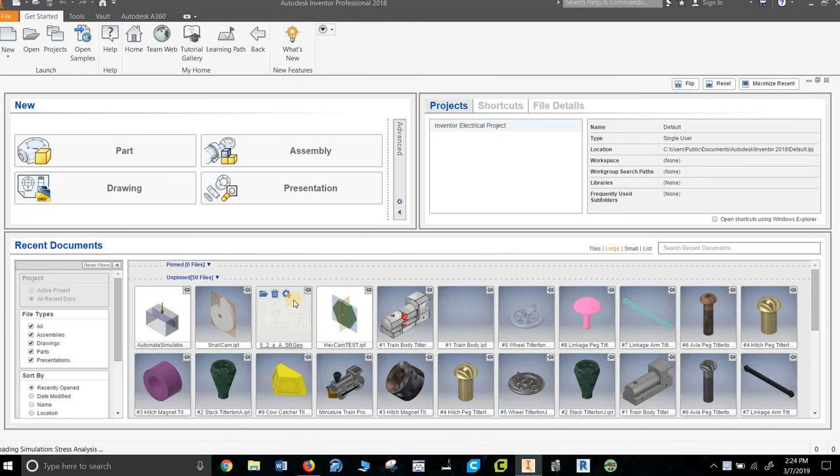So create your part, and the first thing I would do is save it. I'm not actually going to, because I don't save these. I just make them every time I need them, which was good for me to do, but bad for you to do. So I would go File, Save As, and save them.

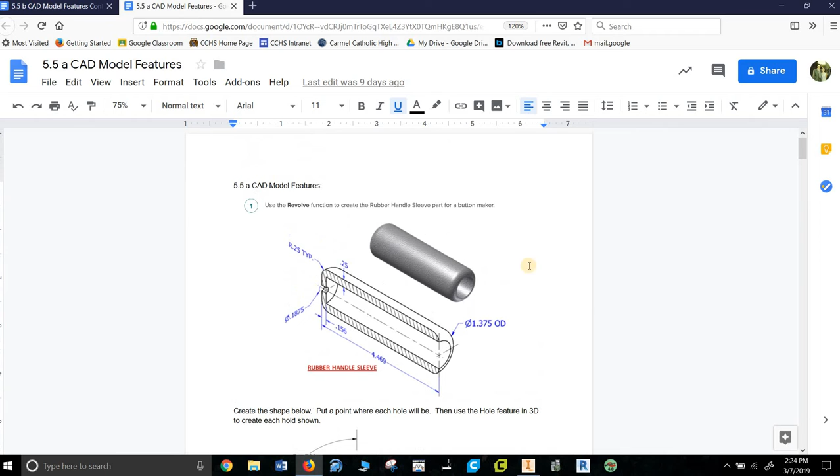First one we're making is a rubber handle sleeve. I will very quickly show you what it looks like. Let's zoom in on that a little bit. So you can come back and pause if you want to look at the dimensions. And I'm going to make it with revolution. So I make a sketch, and I'm going to go right up the middle of this thing. Actually I'll go up the middle first. It's 4.469 long.

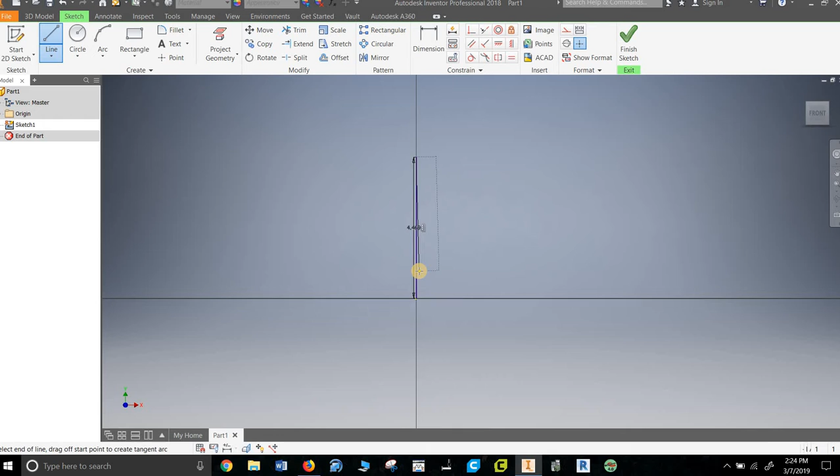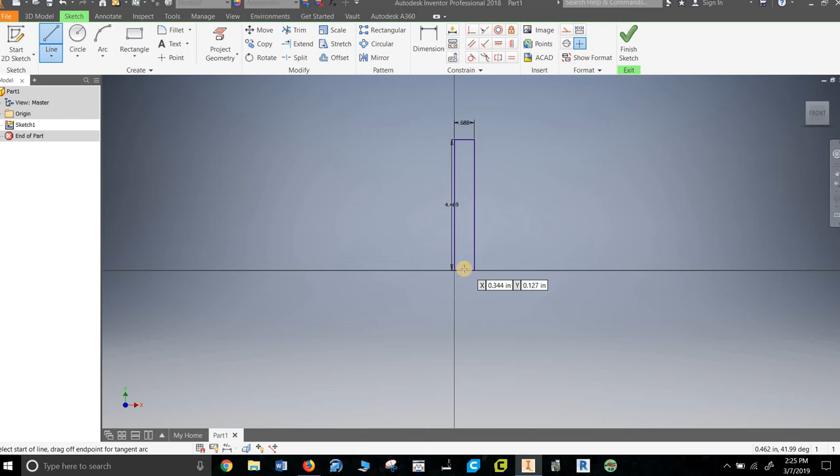And then it goes over 1.375/2. And it comes down and back over. Now, the thickness of this is actually 0.25, so I am going to draw a vertical line in here. Then I'm going to go in and dimension it. And by the way, this is one of 1,000 different ways to do it.

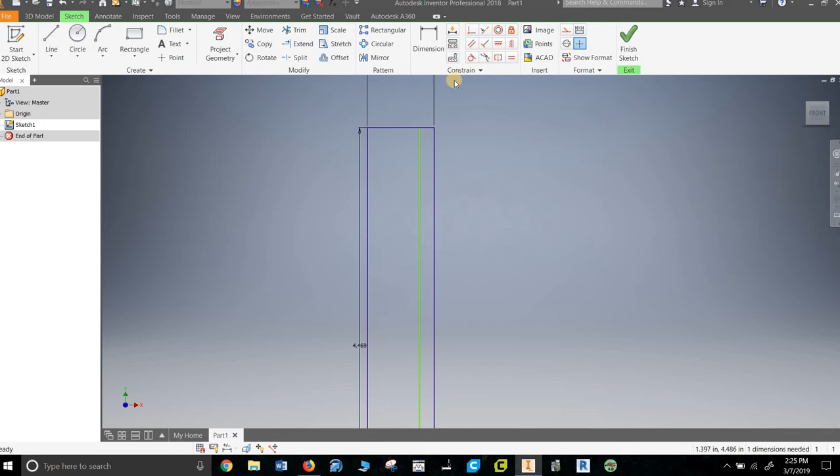Apparently I've overconstrained it somehow. I went to the midpoint. I did not mean to do that. So I'm going to get rid of that. I'm going to make a line anywhere here. So it read the midpoint, so it was constrained. And I might as well put the dimension up here. See, now it doesn't have any problem with the dimension. And that is 0.25 thick. And then I'm going to trim the top. So now we just have that.

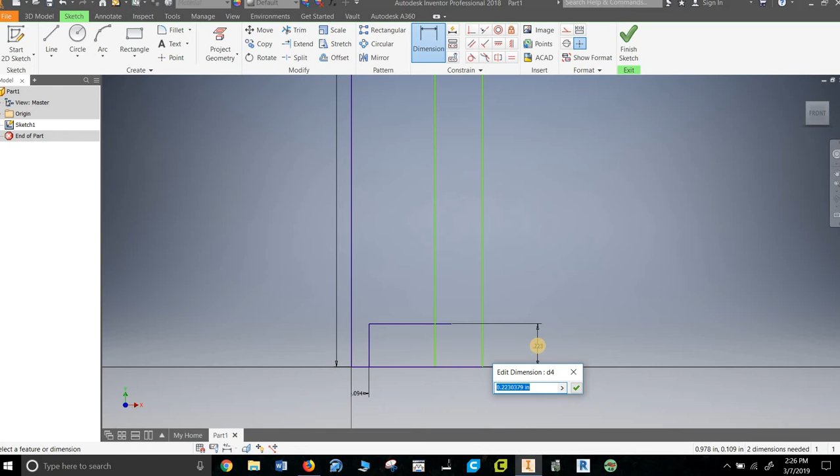And then I am going to put a line here, up, and over. And this is supposed to have a diameter of 0.1875, so I'll divide by 2 since it's a radius. And this is supposed to have a thickness of 0.156. Happy, trim the excess off, goodbye, goodbye. Finish sketch, hit the home button so I can see what I'm looking at, and revolve.

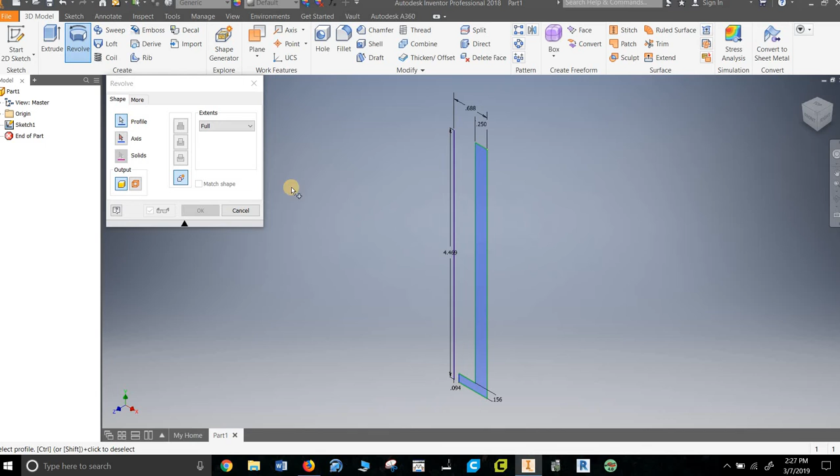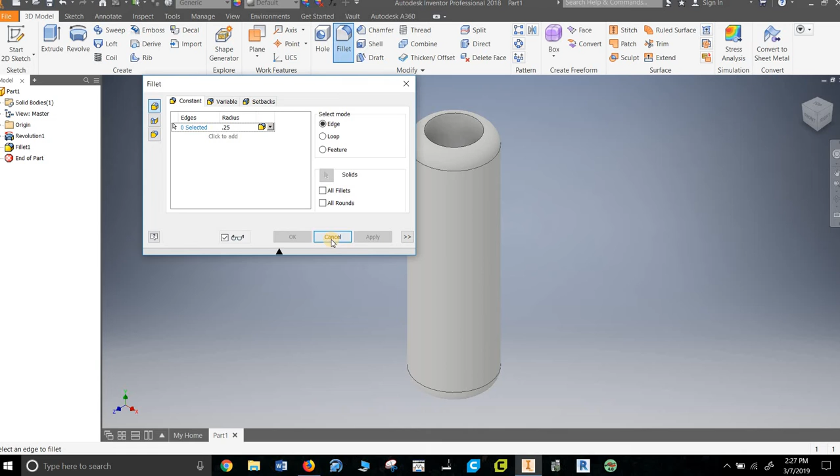I thought it automatically would pick. So I pick the profile, that's what I want to revolve, then I pick the axis, that's what I want to revolve around, and we are good to go. The last thing it's going to ask me to do is to put a fillet on it, or fillet like we like to say in class, which is weird, but what are you going to do? And that's a 0.25 typical, and it goes here and down here. So we are done with that.

So there it is, that's our piece. I always like to say you should make it a nice color, but I'm not going to worry about it right now. So that is your rubber handle. Let's make a new one.

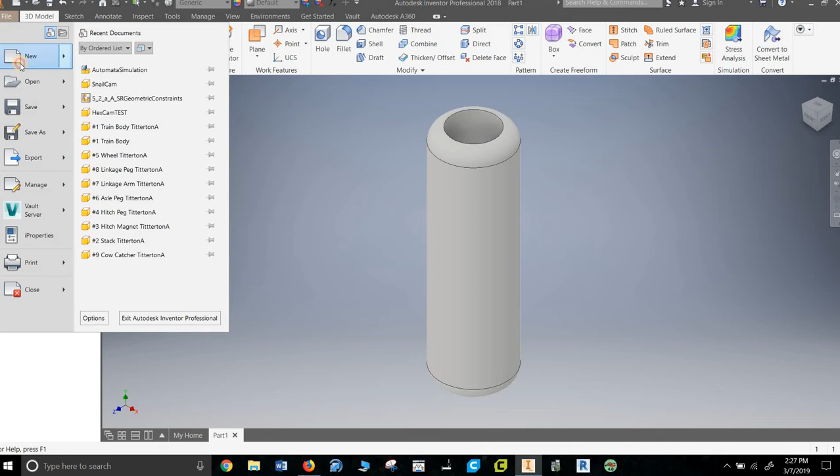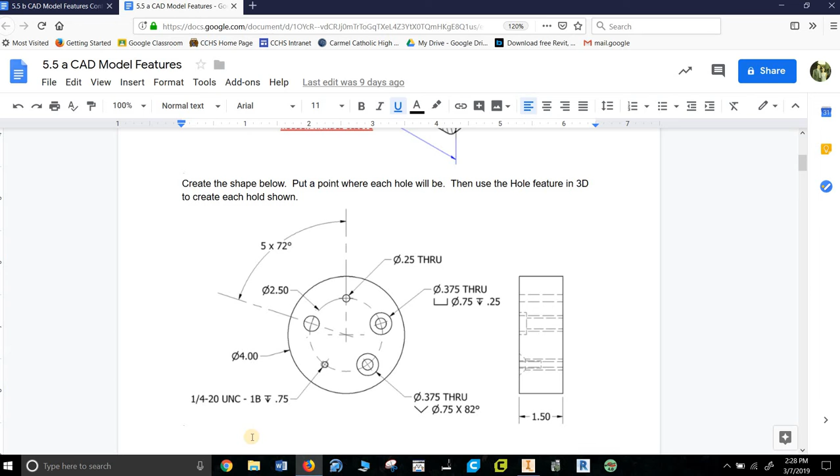And now we're going to practice putting holes in. So we put a sketch, and, promised I would do this, that's what it looks like. Now there's 5 holes here, one that they're not defining at all. I'm not going to worry about it too much, I'll figure it out when I get there. The other 4 are a little tricky, or just take getting used to. So this is a 4-inch diameter. Finish and home it. Extrude it 1.5 inches.

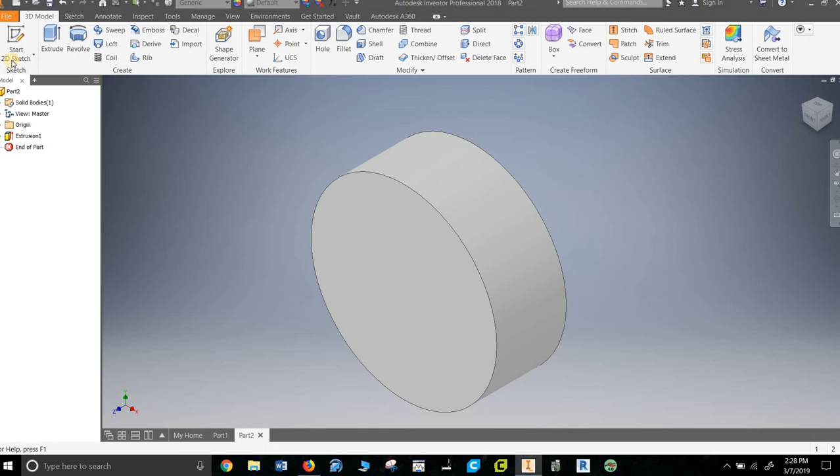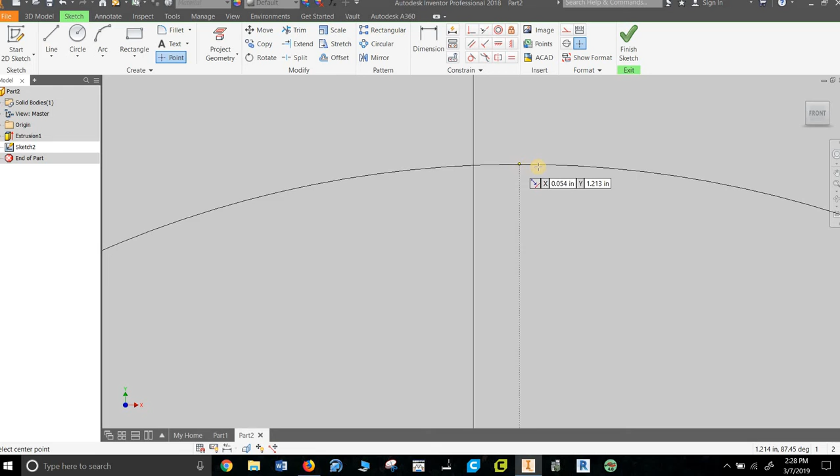And start a sketch here. Now this is supposed to be on a circle that's 2.5. But if you don't get the circle, I wouldn't worry about it too much. They're just to locate. This is hole practice. I don't really care, so I'm going to call it a construction line. And then I'm going to put a point here. Interesting, it does not seem to be at the top. Odd. Doesn't really matter to me. Point there, like I said, I'm just doing hole practice.

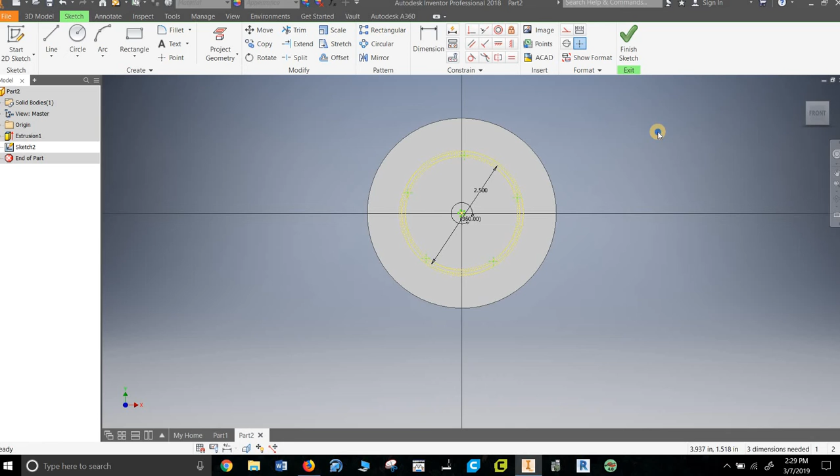Okay, and then I'm going to do a circular pattern. Copy that hole, and copy it about that point. And I'm going to put 5 of them. And it just did something really weird. Undo. Try it again. Zoom in. Moved it. And about the center. So I want the axis here, and I want 5. I was going to say they're almost impossible to see. It doesn't really matter. They might actually even erase when I try and make a hole, but I'm not sure.

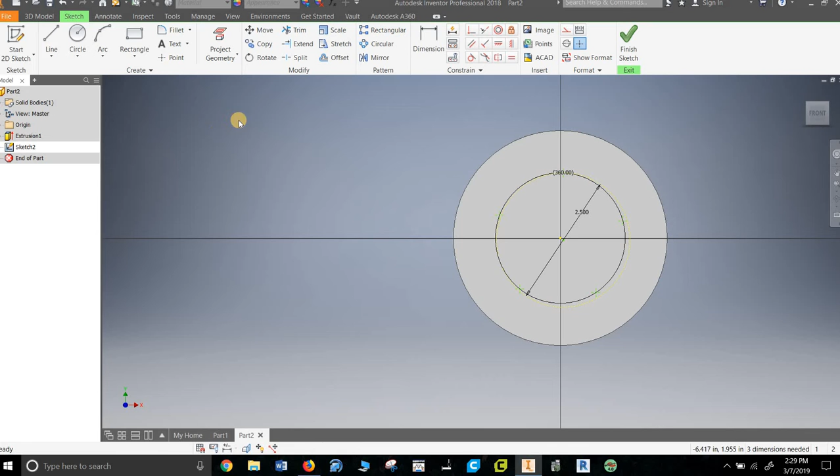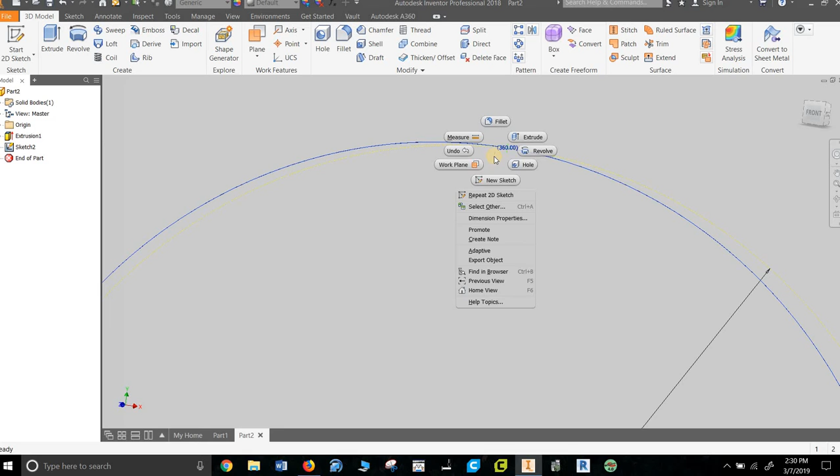So I'm going to click on one. No, finish the sketch. And I'm going to click on the one on top. I think that's it over there. Can't see it at all. I'm going to get rid of this dimension. It's kind of in the way. Won't let me do it unless I'm in the sketch, I'm guessing. Won't let me delete it. Cancel. Undo. Definitely won't let me delete it.

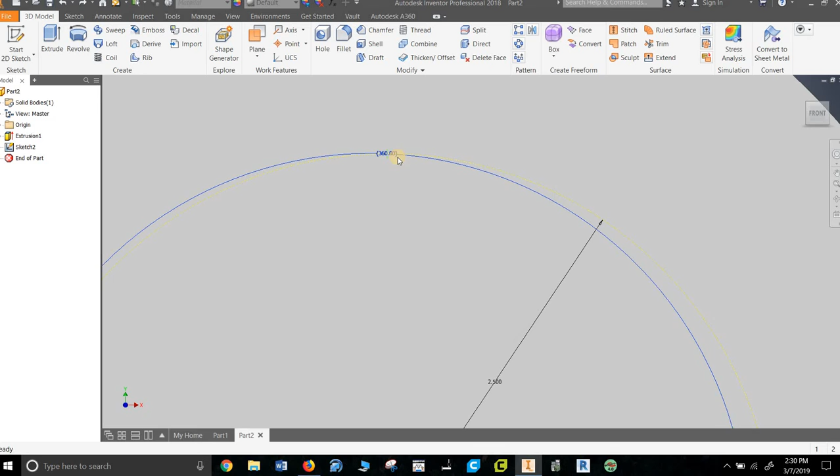Alright, no worries. I'll probably do the holes a different way. So let's just get a point. It wasn't in the sketch.

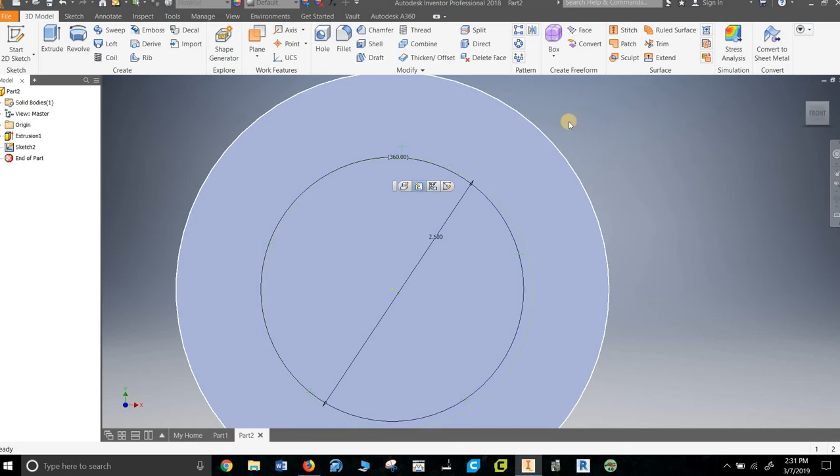Definitely won't let me delete it. Point. I'm gonna put it up here so I can see the doggone thing. And now finish sketch. And hole. And click on it. Now it's trying to click them all. So I'm going to exit out. I'm going to click outside. And then I'm going to click on that and hole. So now it's just doing that one.

And it says 0.25 through. So 0.25 is here. And through means through all. And it's just a regular hole. There's no drill point to it. It's not threaded. Done. Alright.

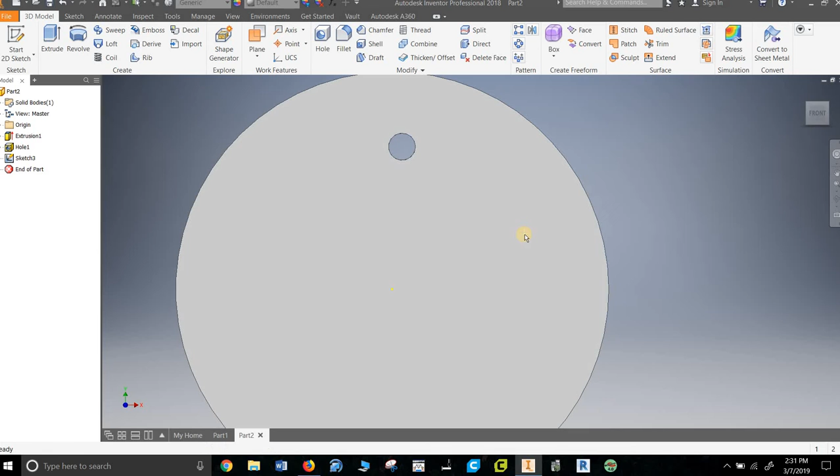Gonna go back to, oh no, I'm gonna start sketch. I'm just gonna keep adding points. This is kind of unelegant, but it's not the end of the world. Put a point here. Finish sketch. Go to that point. Hover over it. Click on it. Click hole right next to it. Now this hole is 0.375 through.

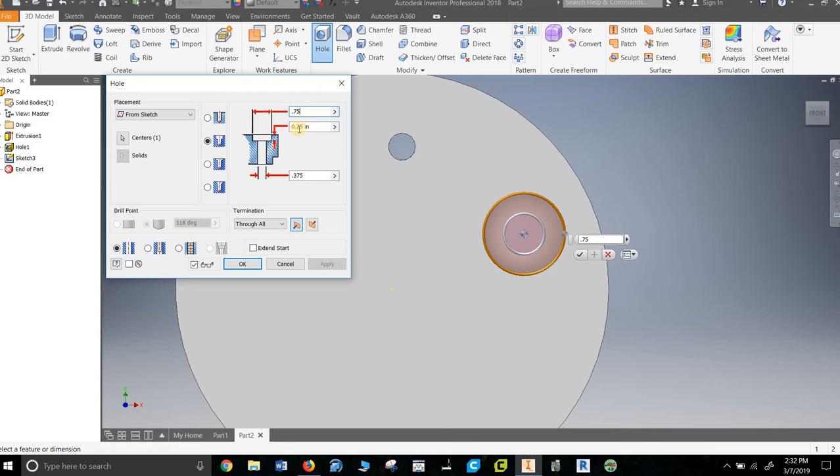It's all the way through, but it's got a little funky cup at the top. And this is if you have a bolt head and you don't want it to show up. You drill this double tapped hole. And it's got that little cup. It says that one's 0.75 diameter. And drop it down 0.25. So if you go back and look at that screen, that's what we're doing.

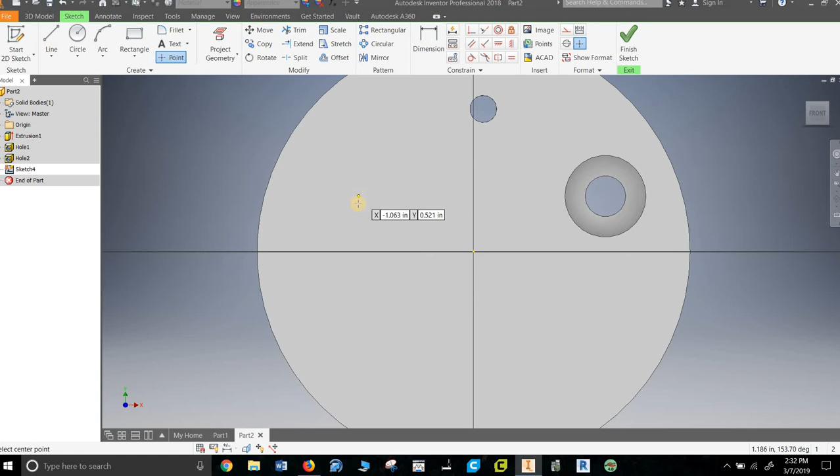So now let's take a look at it. See, it's got that little carve in the top and it's all the way through like we said. So I can put a bolt through there. All sorts of weird stuff. Start a sketch. Put a point. That one's unlabeled. I'm going to do that now, even though it's somewhat of a waste of time.

So, where'd it go? Hole, and who cares? Let's try this one just for the fun of it. It gives me 82 degrees. Let me try this one. I don't know why. This one's like smaller. I don't see the difference. And let's go 1 inch through and leave a tip of 0.375.

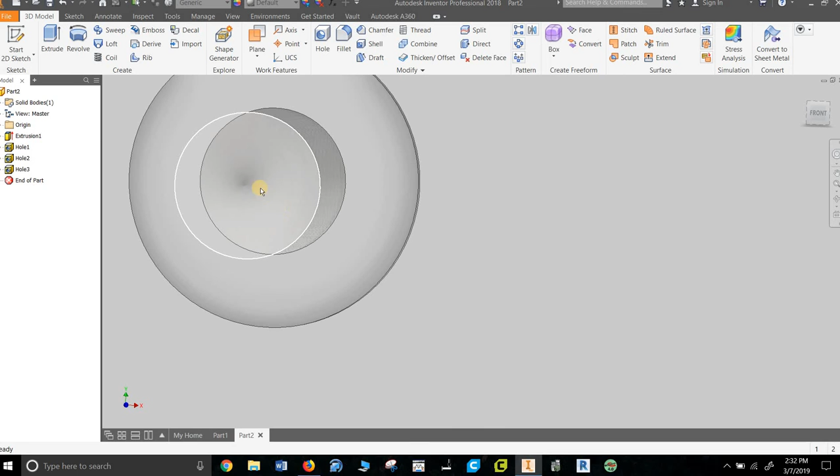Sure. Yeah, why not? You see that it's got a little point to it from the way that little end of the cylinder looks. Doesn't really matter. Alright, 2 to go. Start a sketch. Put a point. Finish sketch. Click on the point.

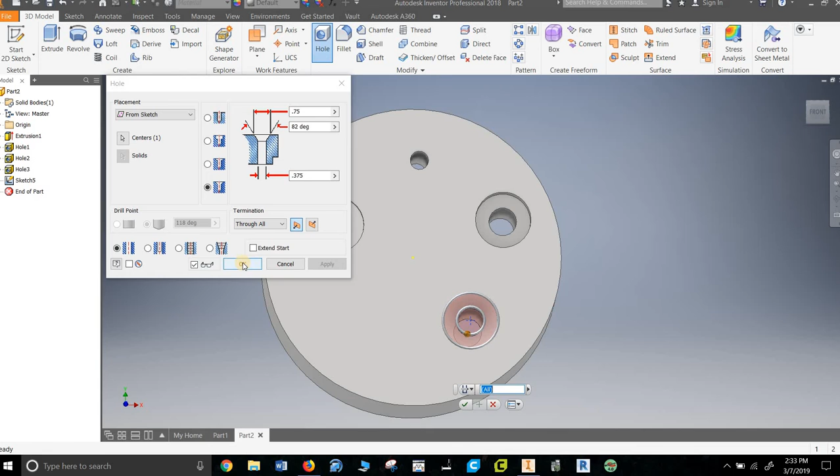Click on hole. Now this one is 0.375 all the way through. So distance goes through, and it's got an angled head. And it says, do me a favor, make that 0.75 by 82, which is what it's already got, and 0.375 all the way through. So this is exactly what our directions asked for, which is a nice coincidence. One more, start a sketch,

put a point, finish sketch, and then click on the dot and the hole. And this is one of the tougher ones. I'm going to hit the threaded button here. It's going to take forever. It's going to pop a window up down here. It's very upsetting to me. It's a 1/4-20 UNC-1B that goes down 0.75 inches.

So it's not through, so I'm going to have to click this, but I don't want to click anything yet. I don't know why my computer takes this long to do it, but it does. It'll pop up any second now, but it's extremely annoying. This is annoying for a new person because they're like, wait a minute, how long is this going to last? And yeah, it lasts a while.

So this is down 0.75, so this is 0.75. Doesn't say whether it's a point or not, so we'll leave it as point. We could also say it's square instead of point over here. It has not got that head, so I'm on the wrong one, so let's go with this simple head. And we do want it threaded all the way. It doesn't say, so we're going to thread it all the way, so that's fine.

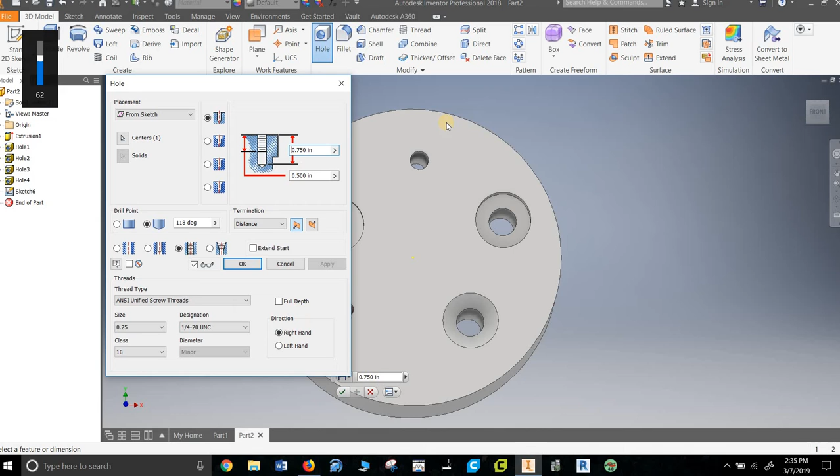The threading's set up, and we want a 1/4 inch screw, so we go over here, we hit size, and we go find 0.25, and it's a 1/4-20 UNC, and it's class 1B. Class tells you how good a bolt it is. 1B I think it's better than 2B, but I'm not honestly sure. But we're just following directions, and that's it.

So how do we know we did it right? We look and we see threading in there. That looks a little weird. I want to take a look at that again. Did I hit the wrong button? What's that say?

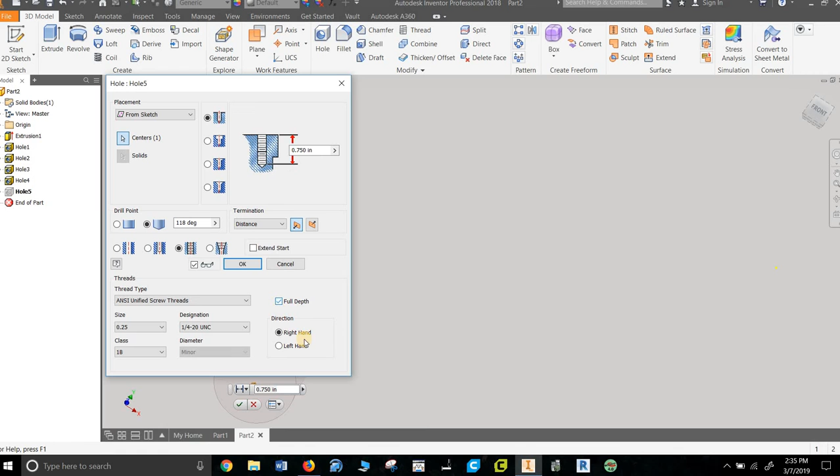No, I hit the right button. Diameter, right-handed, full depth. Better. See what happens now. There's my threading. Didn't hit full depth. So that's threading and holes in general. Holes can be very specific for parts. For our purposes, we're almost always just extrude it and we're pretty much good to go.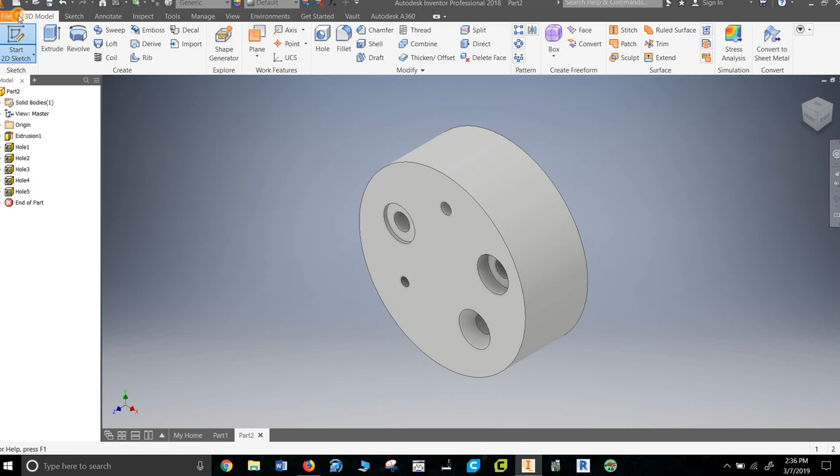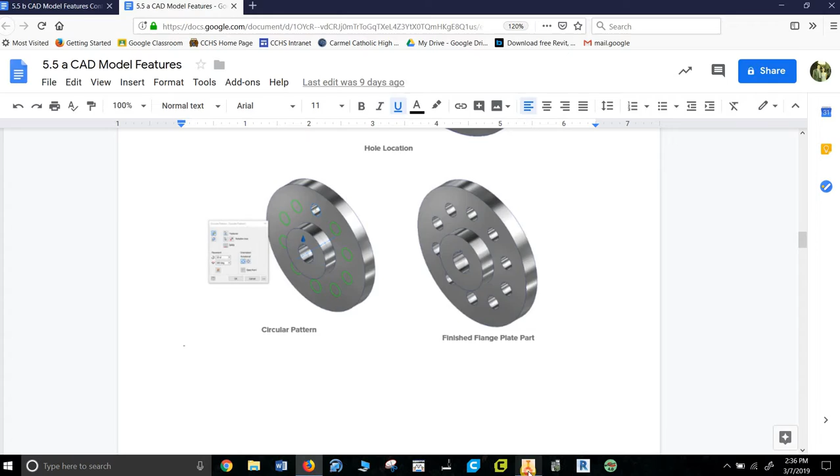Alright, next one. My bad, wrong thing to hit. File, new, create. And we're moving on to this one. Going to create this. I am not going to make this piece in here, just in the interest of time. We're going to rotate it around, and then we're going to put 10 holes in it with a circular pattern. This one's fairly quick. I'll probably find a way to mess it up.

Alright, we want a rectangle out here and a rectangle here. Sure, whatever. We want to trim this piece away. By the way, I always do this a different way. I just think it's a good idea to say, let me try something different instead of the same old, same old. So from here to here is 0.375. Ooh, live and learn. And from here to here is 2.5.

And from... we're rotating that part around. From here to here is 1. Didn't know how I was going to do that. And from here to here is... cancel. Undo, Control Z. From here to here is 1. I'm missing that this is also 0.5.

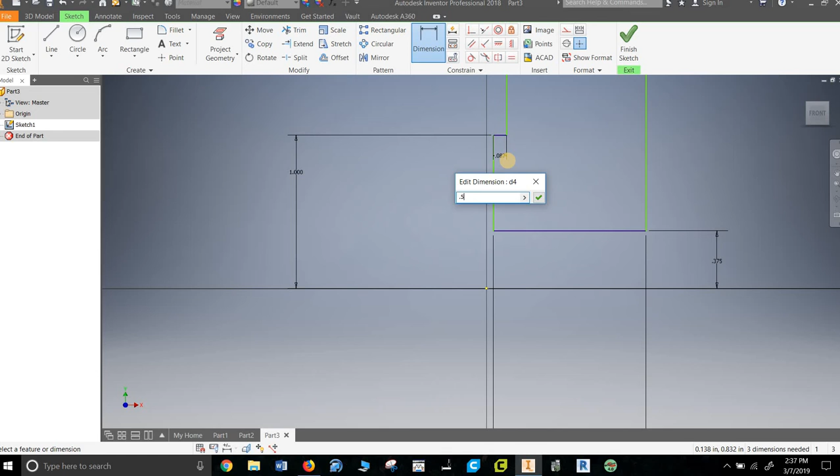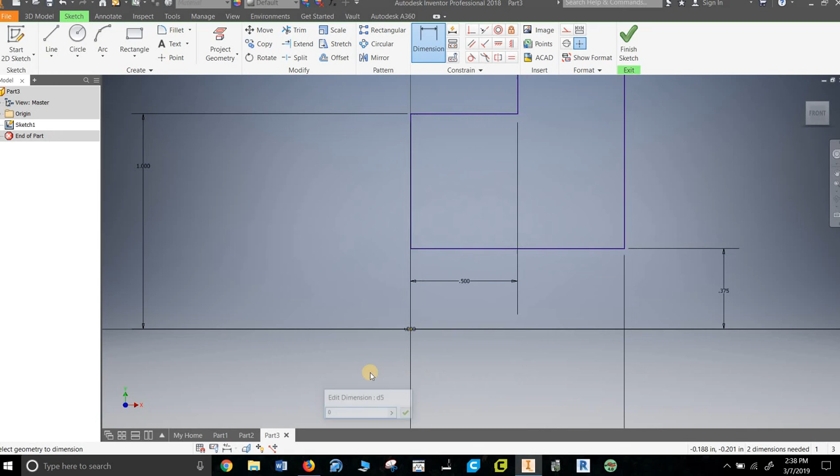No, it looks good. Only complaint, I would like to have this line up. I wonder if I can set up a constraint where they'll be in line. No, I know what I can do. Dimension from here to here. Let's say 0. That's pretty slick. Alright, there it is.

Rotate, revolve. That's what I want to revolve. Cancel. It's not reading. This happens. It's got a gap somewhere in it. I can't see it. So we're going to close the loop and find the gap. Close loop. Yeah, sure. Around the horn. Multiple sketch points. I would like to combine them all. It let me. Sometimes it doesn't. And I close the loop. So the way I made it was pretty sloppy. I would never actually do it that way.

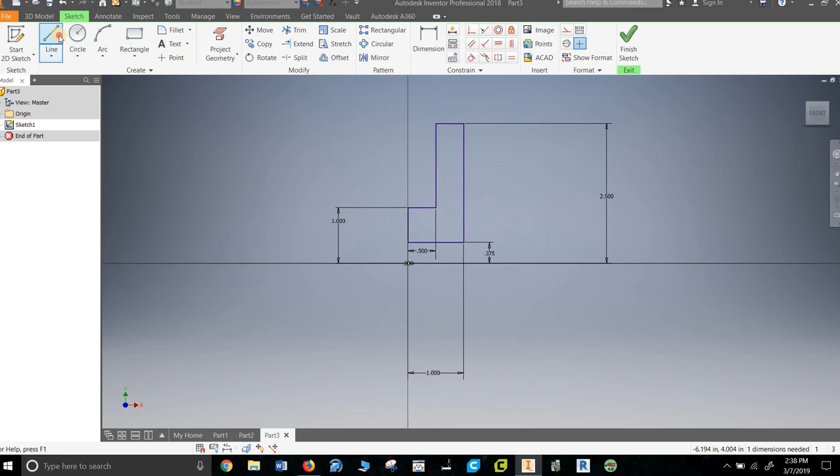Alright, let's pick the profile. Now I pick the axis, and that's down here. Don't have one. Fooey, go back. Give me an axis to work off of, right across the middle. Alright, finish sketch. One more time. Revolve. Axis that you're going to revolve around. OK. Spin it around. By the way, you should be saving all your work, but you already knew that.

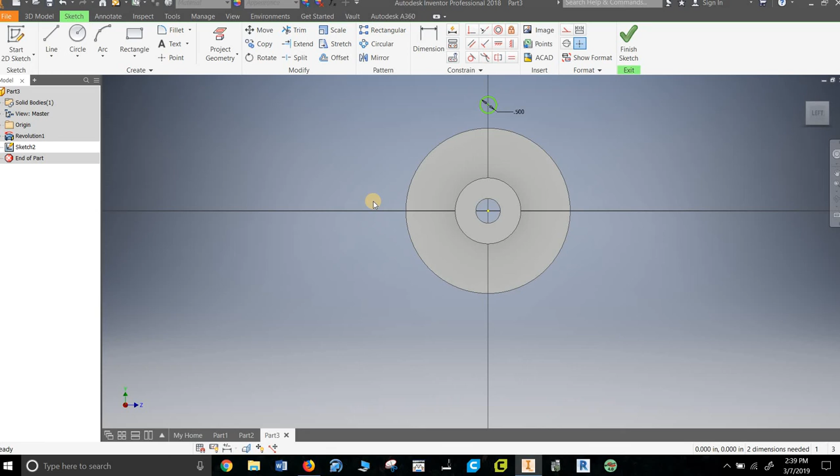Okay, make a circle on the center line. It's 0.3 in diameter. I think. Hard to tell. Looks a little small. Let's make it bigger. 0.5. That's funny. And then it's 1.625 up, I think. It's hard to read. Got a very small print here. 1.625. Nice. Finish. Extrude a hole.

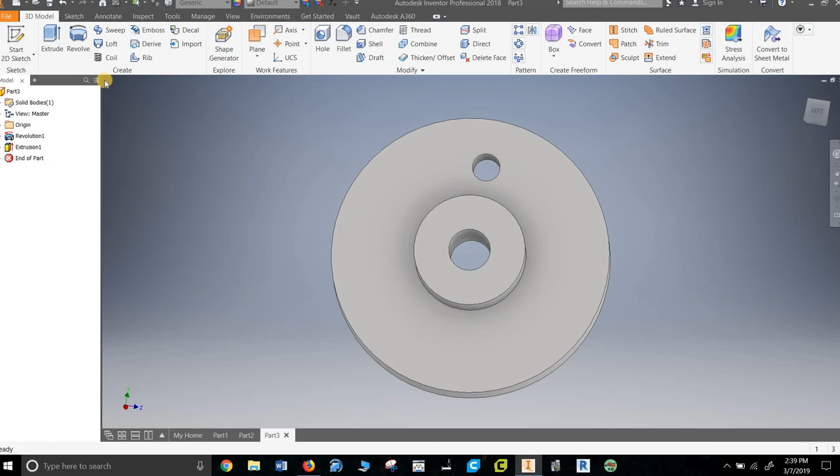And you might be saying, wait a minute, didn't we just make a circular pattern while we were in Sketch? And yeah, that's the whole point. I want to show you can do it here or in Sketch. They're both good. What do I want to rotate? That. Rotation axis. I want to rotate around there. How many do I want? 10, I believe. There we go. It's called a flange. Connect a couple pipes with it and put lots of bolts through here and tighten them all up.

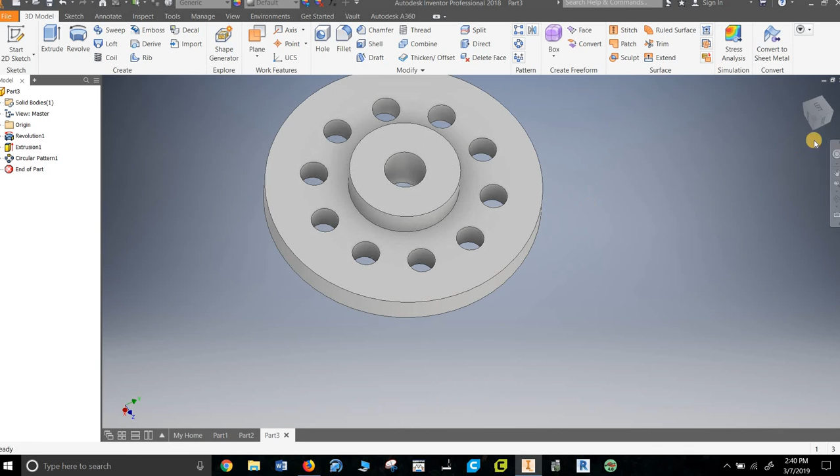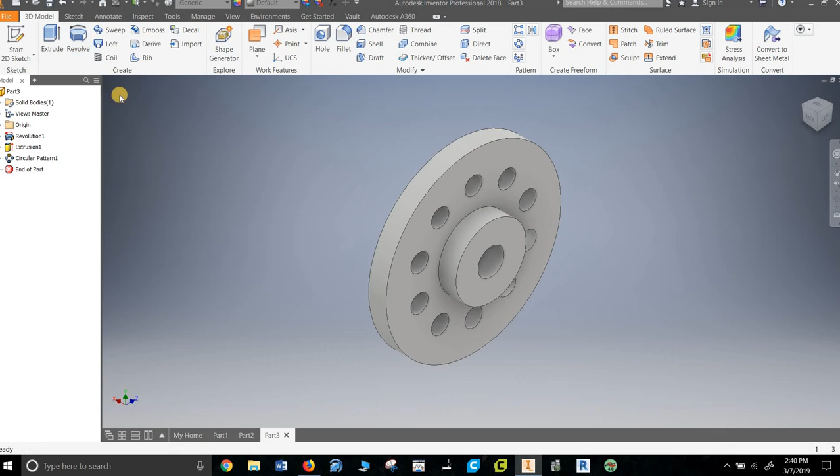I don't like that. Yeah, let's go with that. Set current view as home and fit to view. This one at home. There we go. Alright, we have a few more. This is a tire from an Automoblox car, so new. Great. Start sketch. Circle. That goes out to 1.65. Offset it. 0.1.

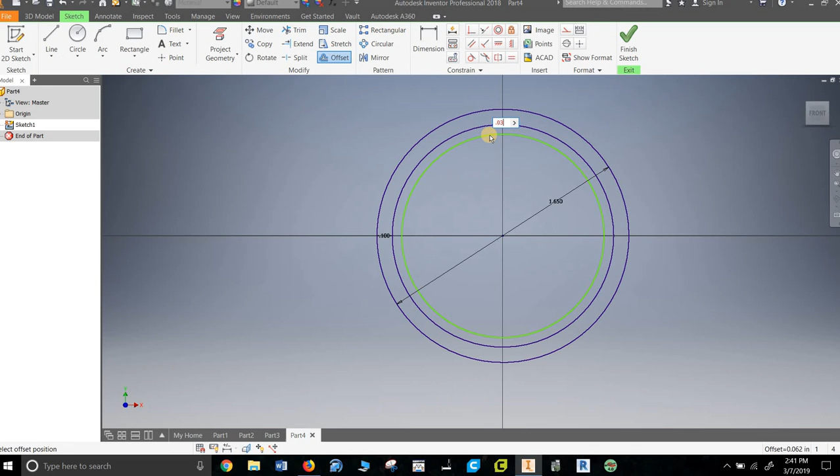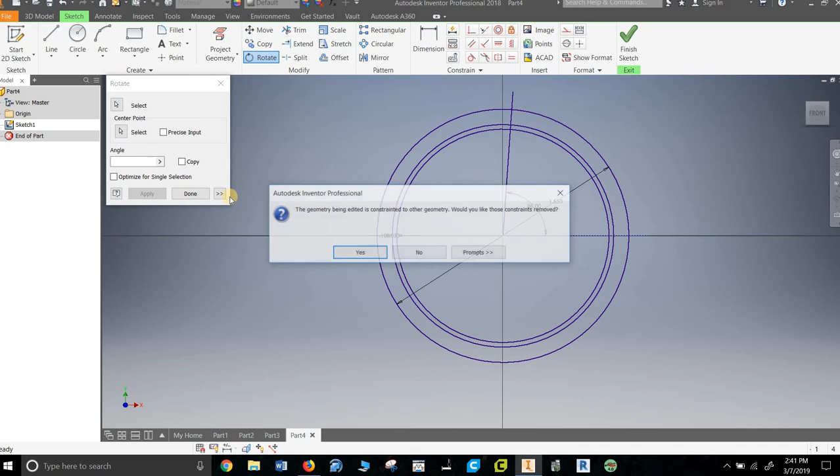And offset it again. I'm going to do this all at once. I usually don't do it this way. 0.03. And then a line up. I don't care how long it is, but I care that it's at 86 degrees because it's got to be 4 degrees off. Now I'm going to play with rotate. I'm not a fan of rotate. I want to rotate that. I want to rotate it around there. Tell it to make a copy and give me 8. See what it does. Did it for me. Before I made copy, it was saying, hey, you can't do this, but of course, this is America. We can do whatever we want.

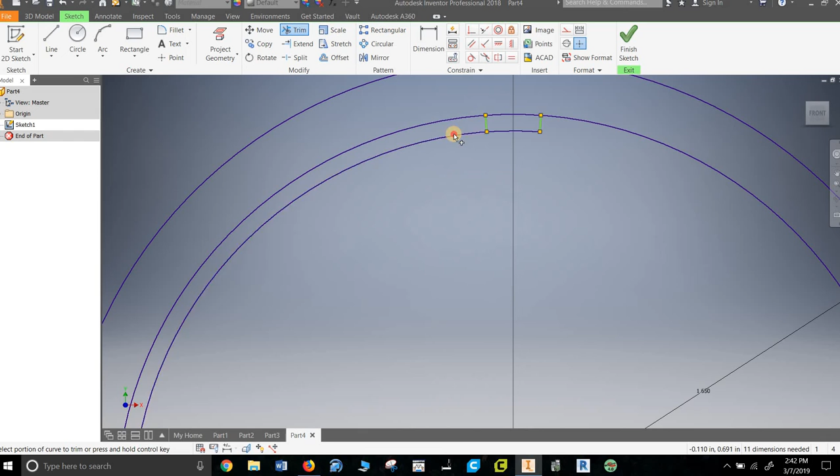So let's trim. Get rid of you, get rid of you, get rid of you, and get rid of you. Finish sketch, send it home. Extrude it. Should get rid of those 2 over there for me. The inner piece. Doesn't say how far to extrude it. Let's go with 1/2 inch. And then we can do a circular pattern, which is really, really cool. Oh, it's not going to let me, I don't think. Shouldn't have done it the way I did it. I'll have to go back and fix that now.

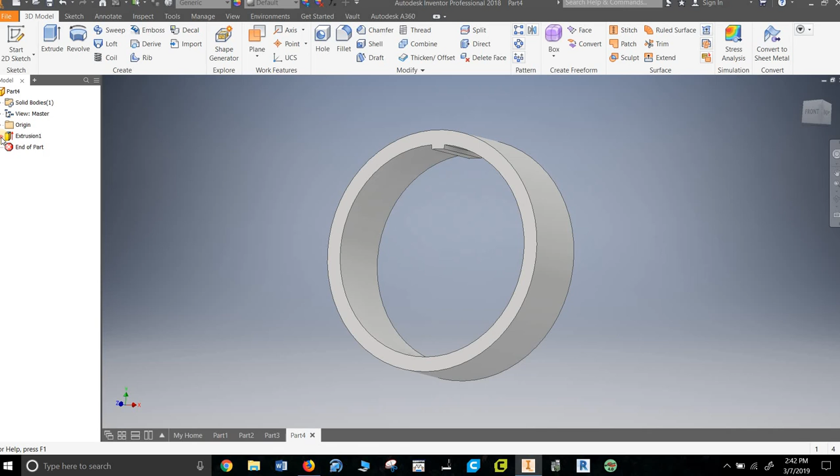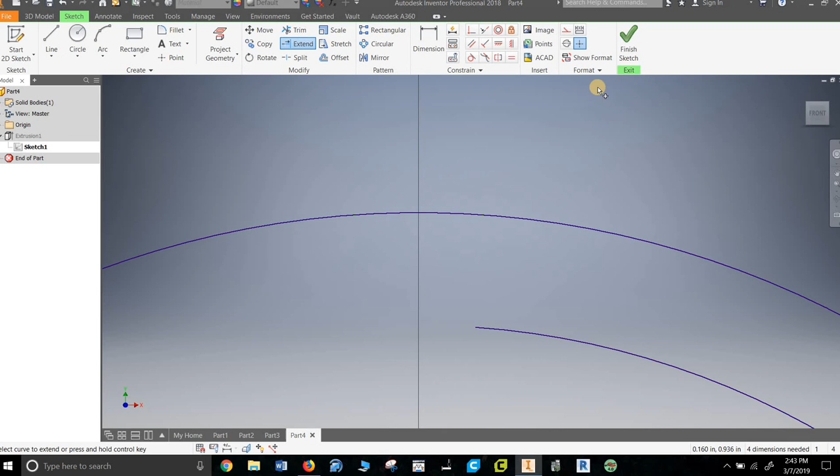Sketch. Zoom in. I got to delete all this. Delete. Delete. Interesting that I got ahead of myself on purpose. Tried to do it a different way and just found out that nope, they're all part of the same thing. Extend. Control Z. What did I just do? Stretch. That's not going to work. Let's put a line in the middle.

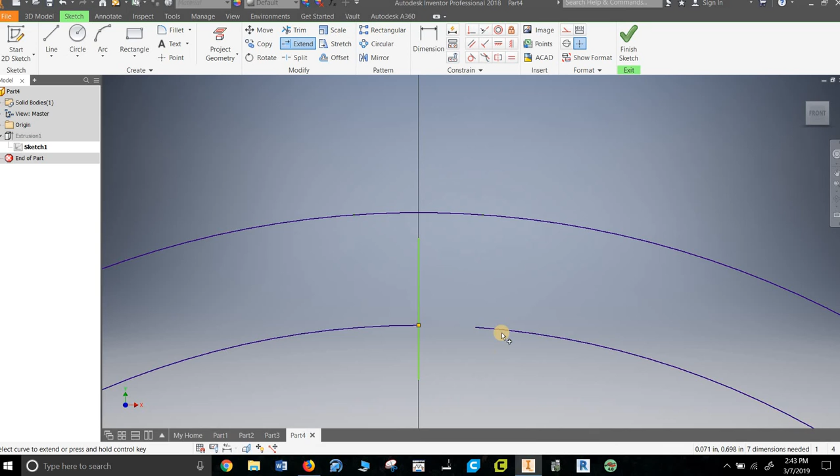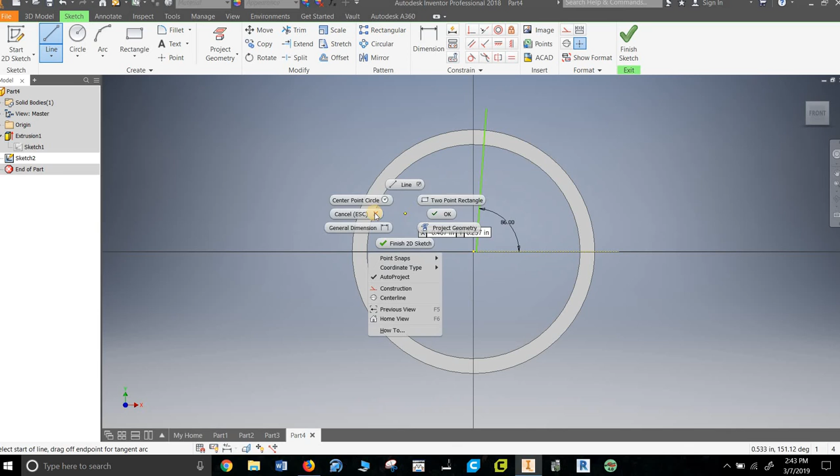Extend you and you. Finish sketch. Now just do it all again because I have to make an individual piece. If you remember, I went here and I went tab to 86. I did rotate. I am not in the mood to rotate again. So create line, and I missed the center, so cancel, undo that one. Let's try again.

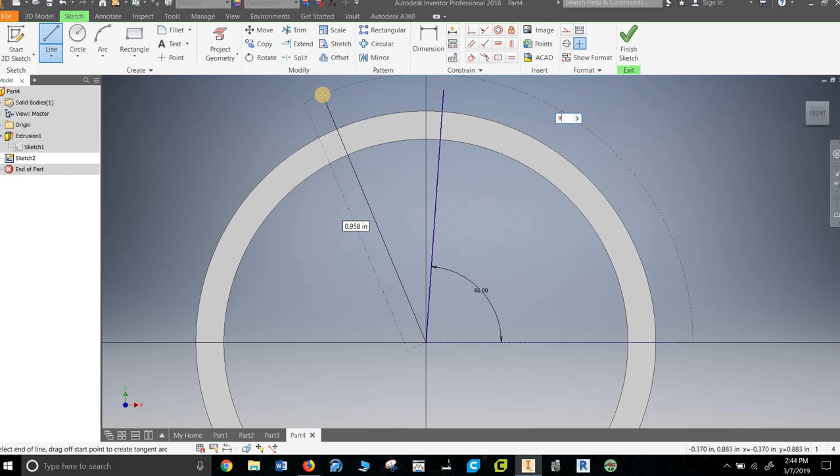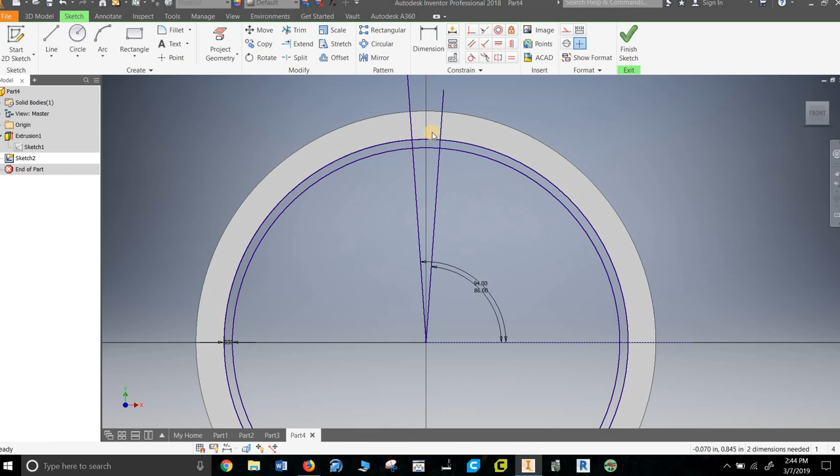Tab 86, line, tab 94. Project geometry, that means I want you. Offset 0.03. And I actually need a circle here. The offset project geometry gives me something to work with, but it's not real. It's very weird. Don't know why it doesn't, but trim,

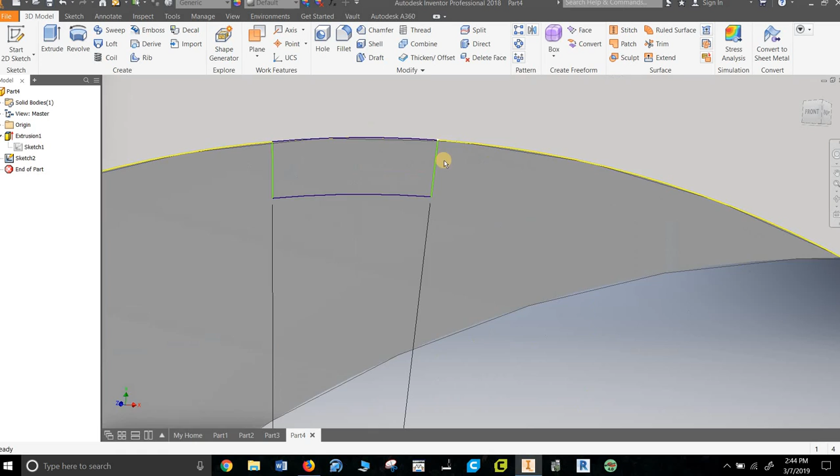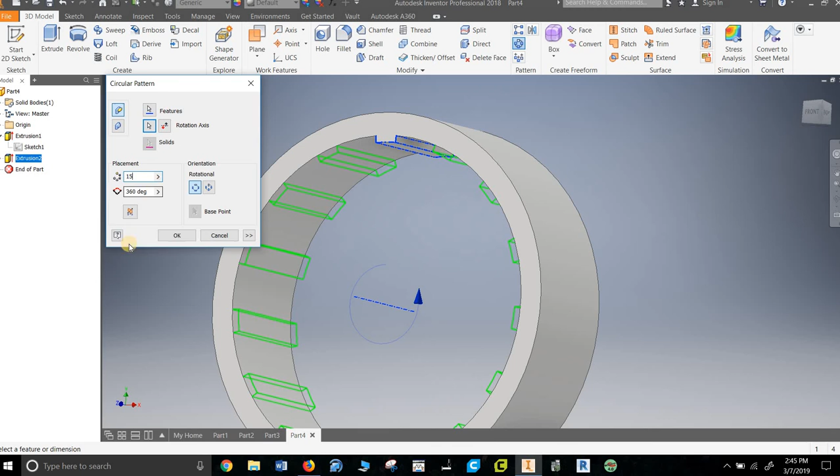Finish, extrude, cancel. Had big problem with this with certain students. Other way, okay. Now I can make a circular pattern with just that stuff because it's not attached. See, it lets me do it this time. Rotate it around this, and I want 15 of them. So we just made the treads of a car.

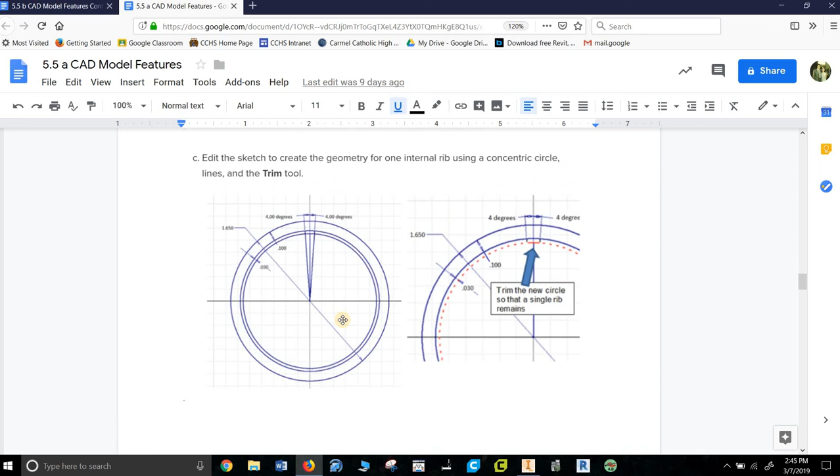Pretty cool. Nearly forgot. Don't know if I showed this one to you. Here's the dimensions. There's how you do that piece. Then around you go 15 times. Not doing the notch in the middle. Home. Very nice. A couple more parts to make. New. Create. Gonna do a very quick job of this.

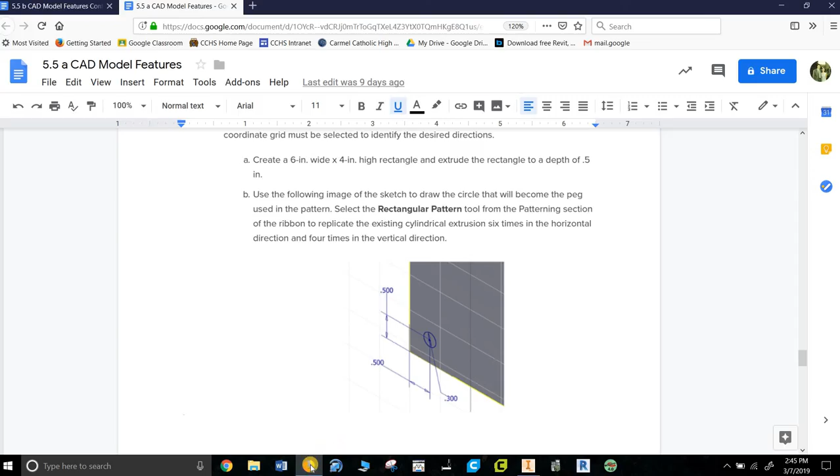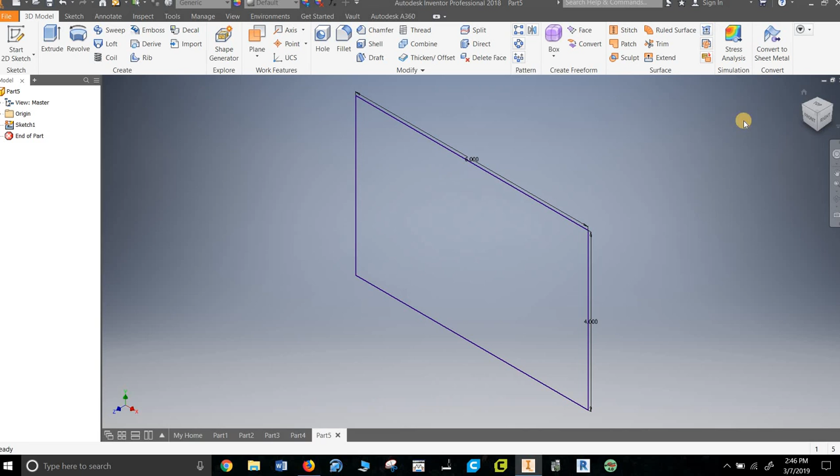So this is a, oh no, this one I need to make. We're gonna learn how to do rectangular patterns. Start. Very simple 4x6 plate. So I did a 6x4, finish sketch, extrude. Doesn't really matter how much, might as well try to be accurate. 0.5 inch extrusion. 0.5. Start a sketch on the front.

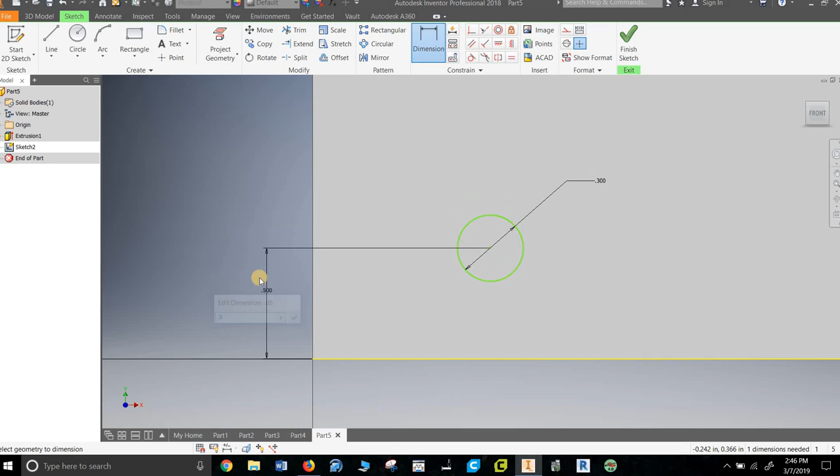Gonna put a little thing down here. Gonna dimension it. Should have just done it there, wasn't paying attention. 0.3. Gonna dimension it here to here. 0.5. Here to here. 0.5. And it says extrude it, doesn't say how much. I'm going to extrude it freakishly long because I think that would be funny. 10. Make sure I can see the whole thing.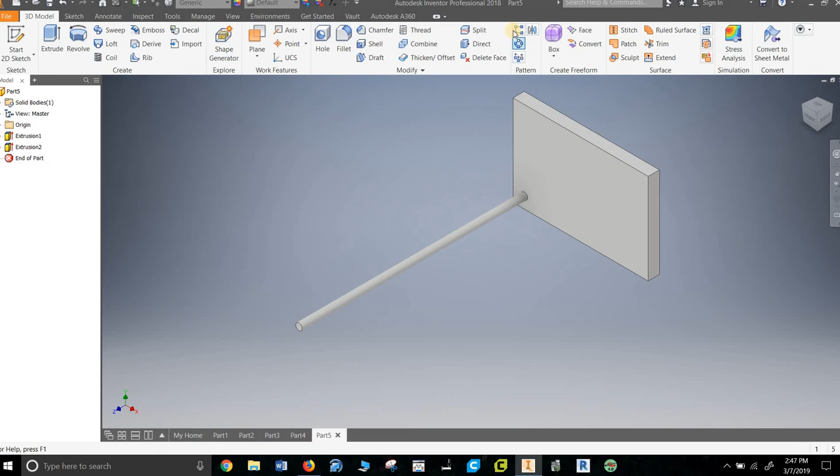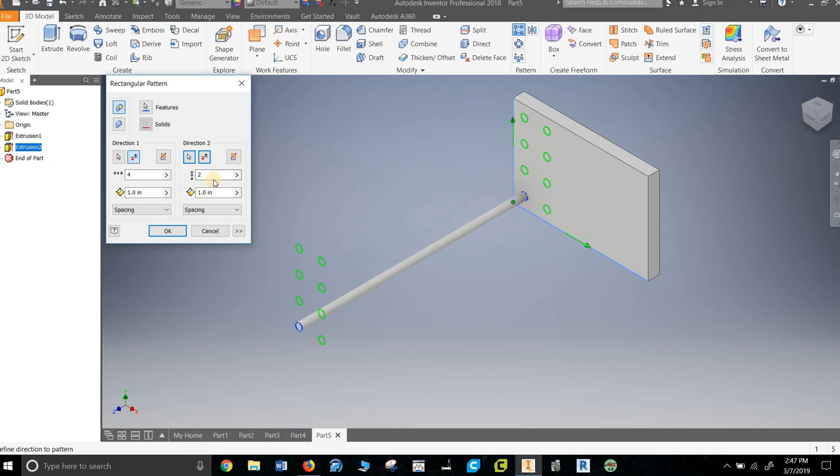And now we get to do a rectangular pattern. This is pretty cool. So rectangular pattern up here in pattern. What are you going to copy? I want to copy you. Alright, tell me the direction you want to copy it. I want to copy it here. I need the arrow to point up. So flip it. Now it's up, and I need 4 of those. I also need it to copy left and right. Arrows in the right direction this time, and I need 2 of those. Boom. Just made a table that will never tip over, nor that you can put your legs under. So that's pretty cool. Rectangular patterning.

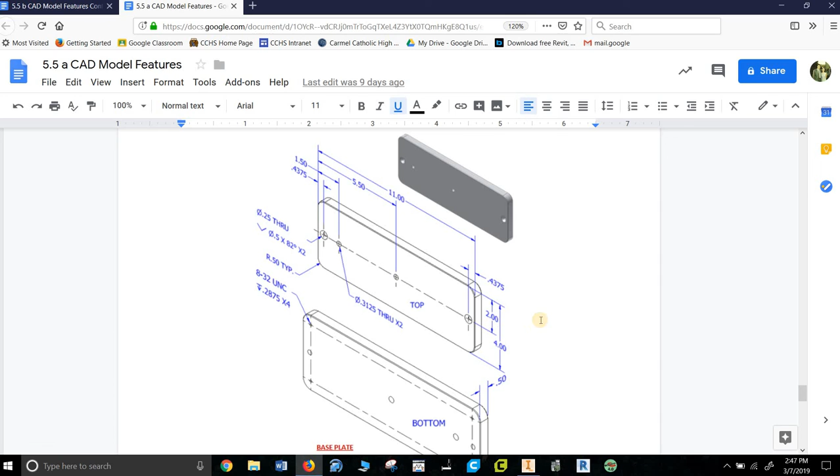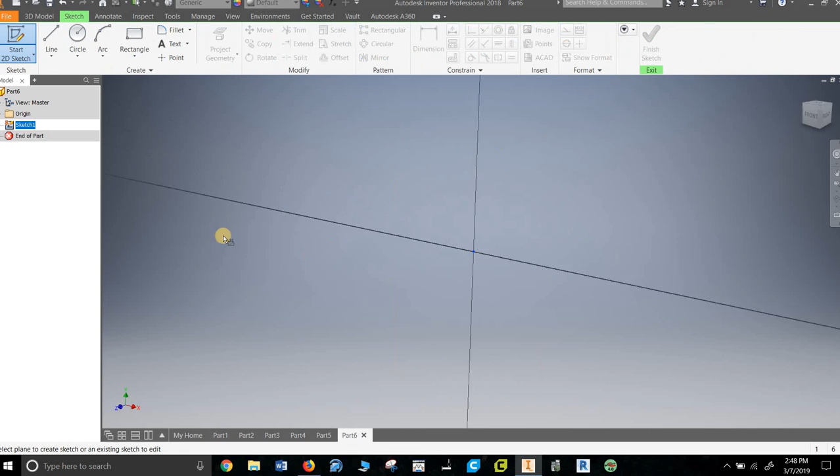There's another one to do here. I actually don't want to show this because my students should be able to figure this out themselves. It's a simple plate with 4 holes in the middle and the edges are filleted. That's for you to do. And then a paper clip with no dimensions. So we'll just kind of slap it together. Start a sketch. Make something resembling the paper clip. The key is to start at the origin. Otherwise it makes it unusually difficult.

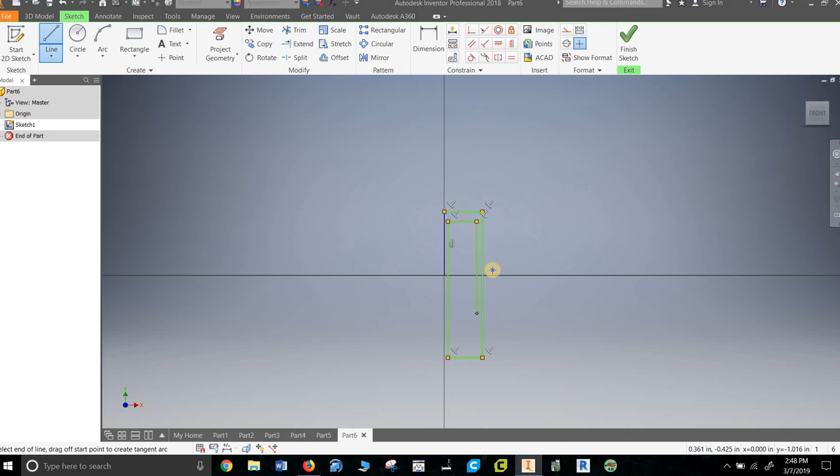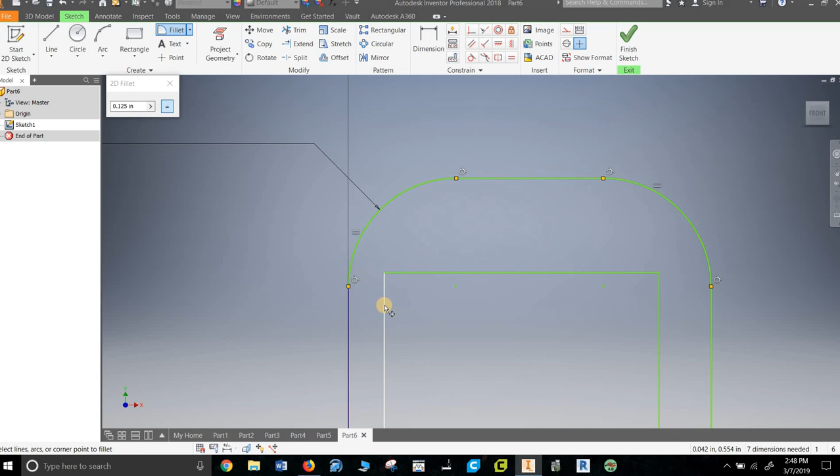Over. And then back up, something like that. Let's fillet the edges. Now this is the part where everybody goes wrong, so be careful. Alright, let's try 0.125, see what it gives me. That's good. Now I had people, oh, they want to be perfect, they want to have it match up. Then they had these lines overlapping and then you can't sweep them, so don't get greedy. Looks good to me. Perfectly curvy? No. Do I care? No. Don't try and be perfect, it's just going to cause problems.

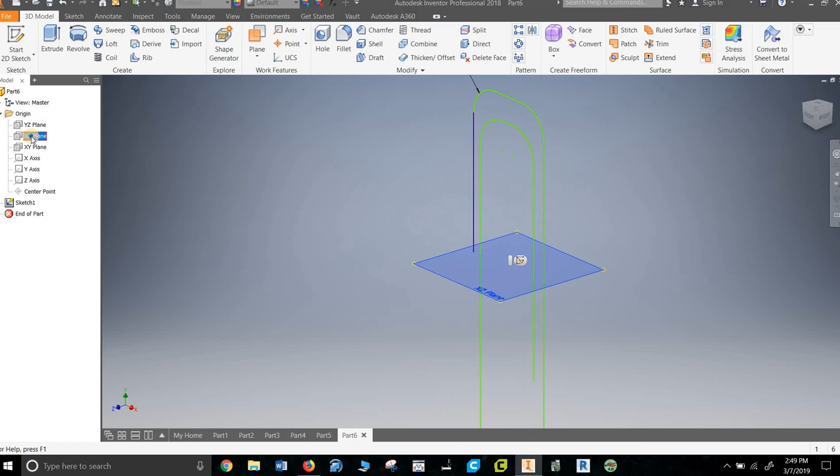Finish your sketch. I need a plane at that starting point, so we go over to origin, we expand it, hover over things, I don't even see that. No. Yes, this is the one I want. So we turn on visibility. We start a sketch in that plane, and we say we're going to sweep a paperclip, which is circular in cross section, and we make it about that big. You can make it bigger if you want, or if it doesn't work, make it smaller.

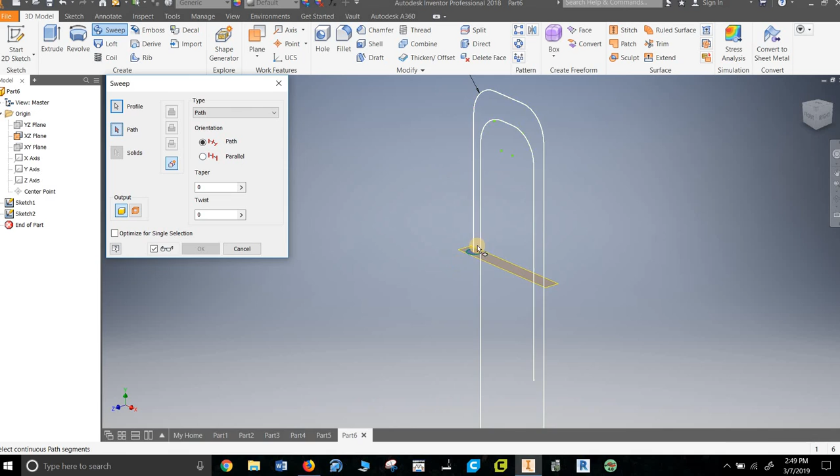And then we have this lovely little sweep function, sweep. It tells me what I want to sweep. It gives me the profile. Hey, you want to sweep the circle, because that's the only area there. What's the path you want to take? And you say, oh, just click on the paperclip, and bang. Got yourself a paperclip. You can go back and make it tighter or cleaner and do whatever you want. It doesn't matter to me. I will turn off the visibility. So there you are. That's 1, 2, 3, 4, 5, 6 parts plus the other one you should do on your own. A lot cooking there. Good luck.